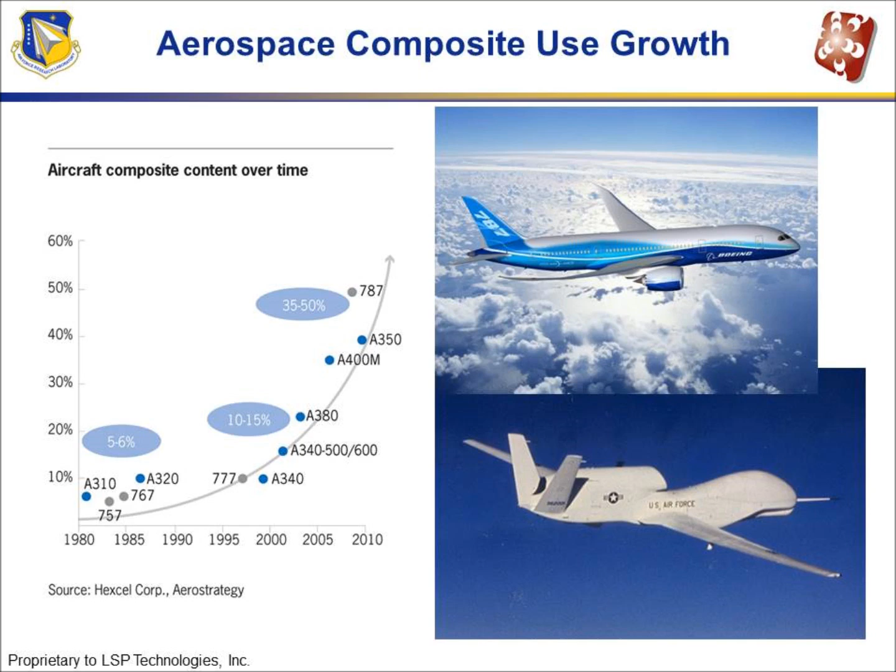They are also used in primary structures in UAVs. For the industry to certify these structures, it is necessary to determine the strength of the adhesive bonds in these structures. Conventional non-destructive testing, NDT methods, are unable to assure that the bond strength is acceptable for service.

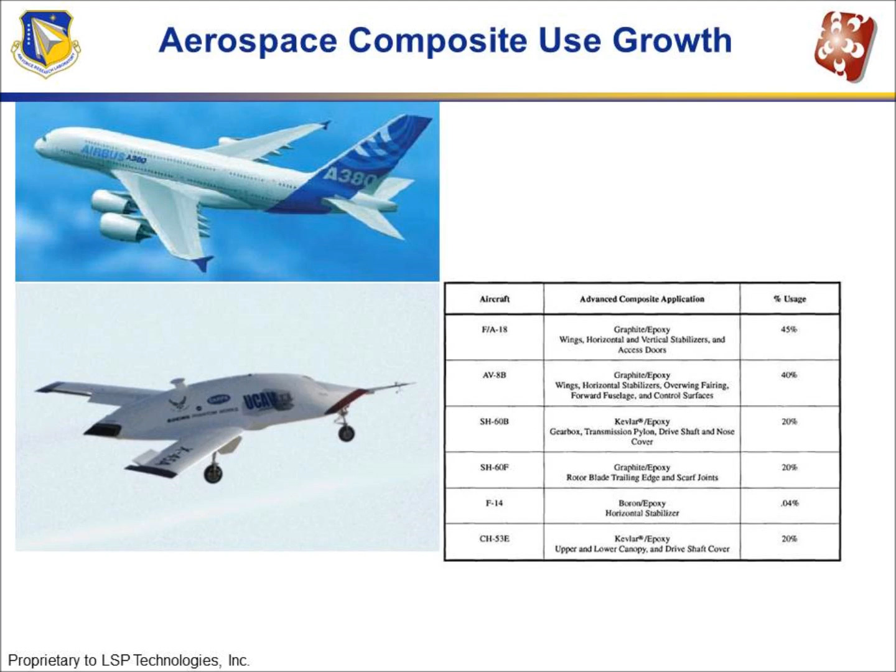There are a number of advantages that bonding has. In particular, composite bonded structures produce greater stiffness. It allows uniform load transfer, forms smoother aerodynamic lines and surfaces, and has the possibility of eliminating rivet holes or significantly reducing them. Bonded structures do require a reliable inspection method for characterizing the strength of composite bonds.

The solution we have developed is called laser bond inspection. This represents how the process works in a simplified fashion.

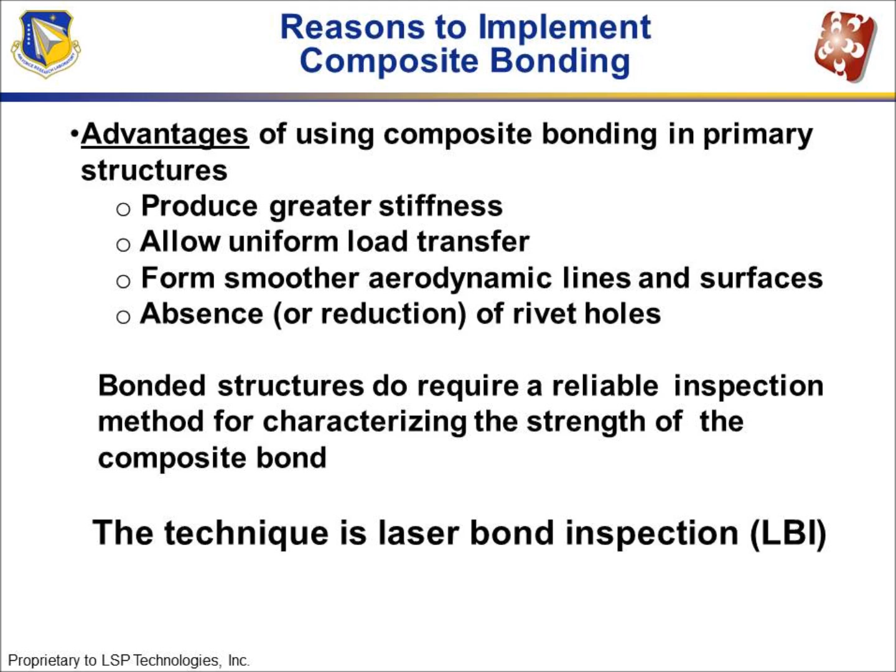Laser bond inspection, or LBI, is a pulsed laser system. Depending upon the type of structure that you're inspecting, the laser parameters could be anywhere from 5 to 50 joules of laser energy and 100 to 200 nanosecond pulses. Typically, our beam diameter is around 10 millimeters.

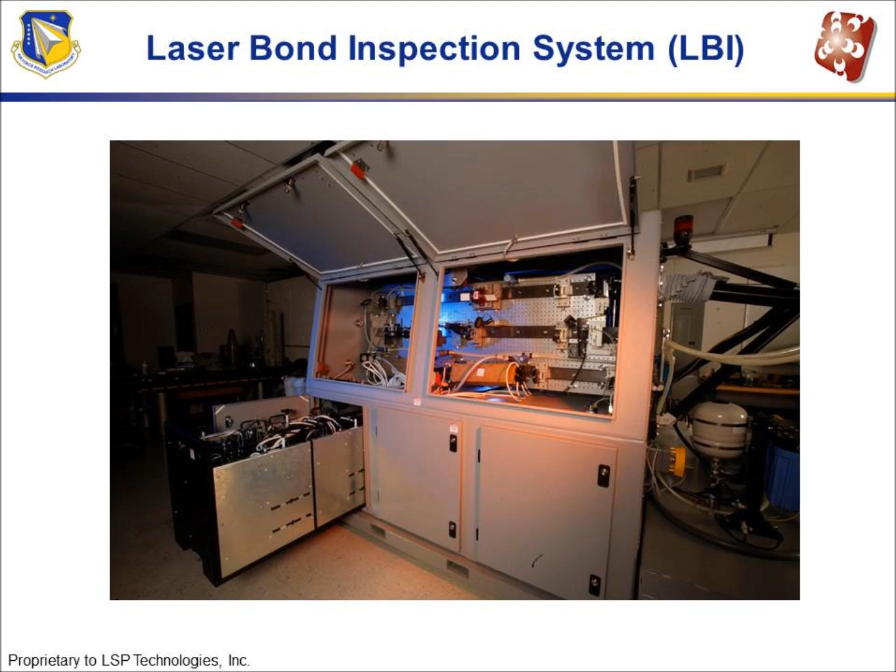Preferably, you'd like to see the beam diameter much larger than the thickness of the bonded structure so that you get reasonably planar waves. The process works like this. You prepare the material to be inspected by applying a thin layer of material to absorb the laser beam, which could be tape or black paint.

Then you flow a thin layer of water over the opaque overlay. What happens is that the laser beam comes through the transparent water overlay, is absorbed by the opaque overlay, a plasma is created and starts to blow off.

The water overlay temporarily contains the plasma and intensifies the shock wave that is then produced as the plasma blows off. This directs the compressive wave to travel forward through the composite material, through the bond line, to the back free surface of the material.

At that point, because of the impedance mismatch between the composite material and the air, you get a reflected tensile wave, not shown here, which comes back through and it interrogates the bond line.

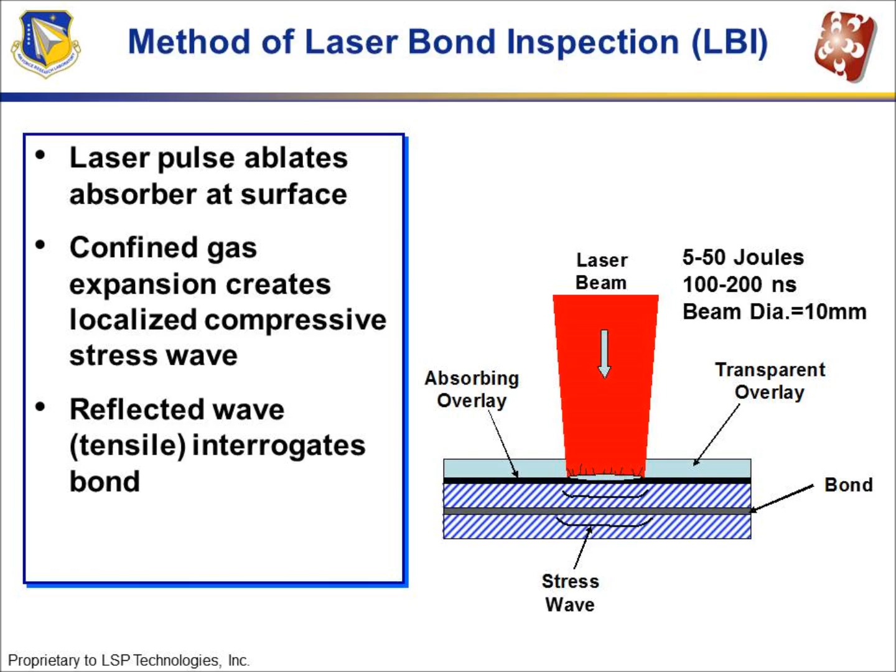This graph is a simplified version of what happens in the composite material where you produce the shock wave. It describes how we form the tensile wave.

Again, here's a schematic of what happens as I described before. The laser beam comes in, goes through the overlays, produces a shock wave that propagates through. Here's a one-dimensional view, a simplified view, in which the beam diameter would be much greater than the thickness of the material.

You form a compressive wave, it travels through the material, and as it reaches the back surface, it begins to get reflected as a tensile wave, and so it gets canceled out as the tensile wave and compressive wave starts propagating backwards. You have a small region where there is very low stress.

After it continues to propagate, it propagates outside, beyond where the compressive wave was, and you have a tensile wave then that is flowing back towards the bond line, which will stress the bond line and interrogate the bond line to test the strength of the bond line.

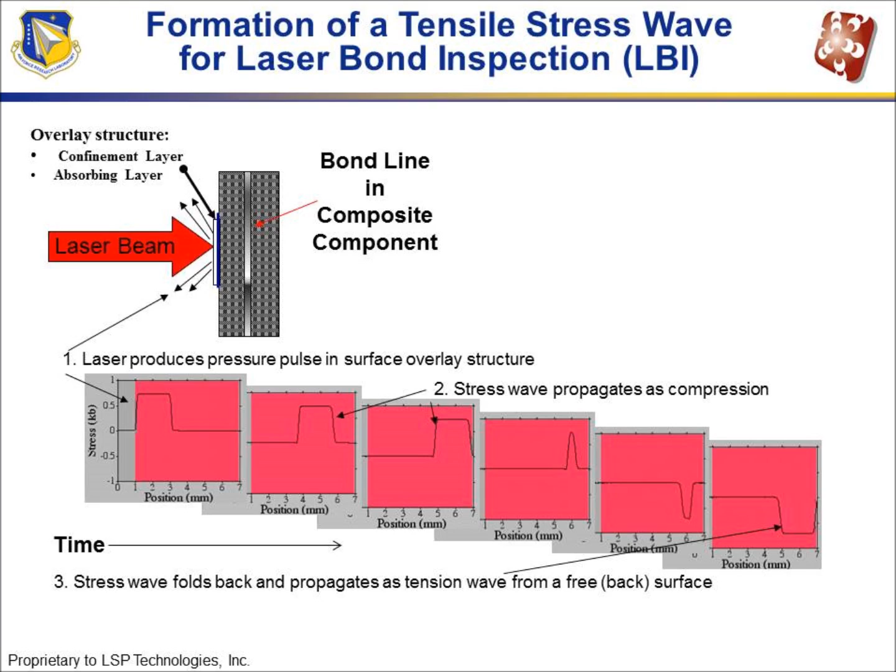This is a code simulation that results from a 19 millimeter diameter solid beam that is interrogating a 19 millimeter thick aluminum plate. In this particular case, since the beam diameter is about the same thickness as the aluminum plate, the stress waves that are produced are much more complicated.

It's just not made up of a single compressive wave moving forward, but actually has compressive and tensile waves moving forward. The complication exists because of the edge effects on the beam finite dimensions, but this shows exactly what happens at the back surface.

Shown here is the XY dimension of a particular shot in time at 3 microsecond time points after producing the shock wave. You can see here that this is a moment in time in which the main compressive is close to the back surface.

What is plotted here is the rear surface velocity as a function of time. The plot shows that the main stress wave hits around a little after 3.4 microseconds, and there is the second tensile wave. Then there's a third compressive wave and a second tensile.

What happens is that at this time, the compressive stress wave reflects off, comes back through, gets reflected off of this surface, comes back through again, but is attenuated in its motion through the material, and the period starts again. This is a sample of a case where the diameter of the solid beam is approximately the thickness of the aluminum plate.

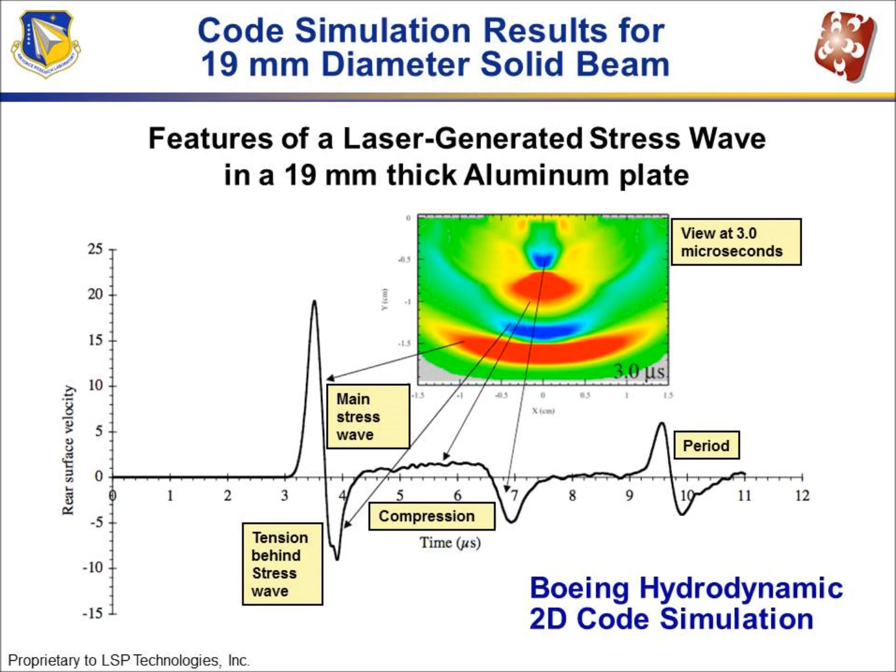Laser bond inspection creates a stress wave that can test the strength of an adhesive interface in a composite bond. The strength of the stress wave can be selected by varying the energy and pulse width of the laser beam. The strength of the reflected tensile stress wave produced can be selected to fail weak bonds while strong bonds are unaffected. I'll describe that more when we cover how we measure bond strength.

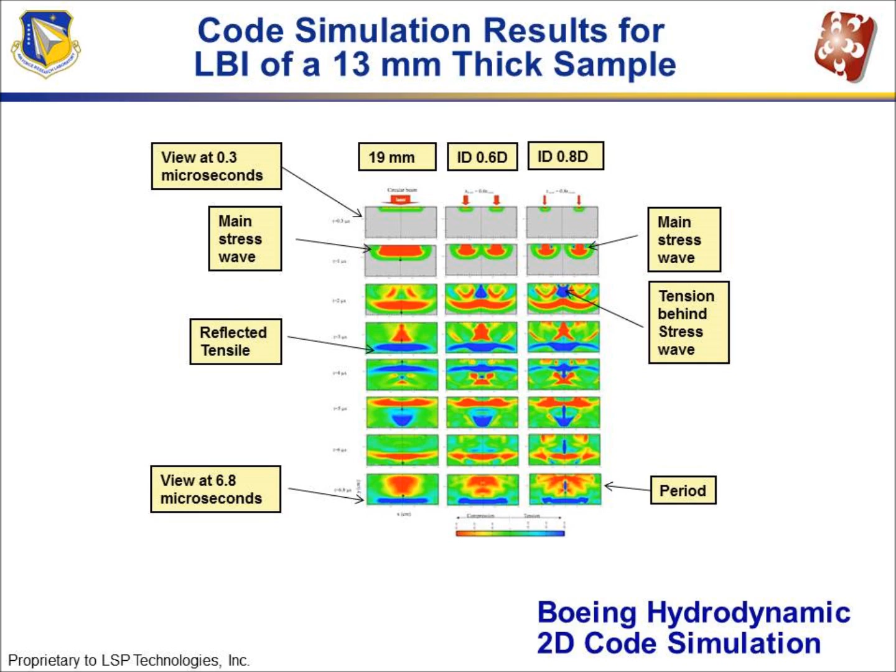LBI can be set to detect weak bonds. It is non-destructive to strong bonds. It can also detect kissing bonds. These are bonds in which the bond line is in intimate contact with the laminate that is around it. There's no gap between the bond line and the composite material, but it doesn't have good adhesion to the surface. So there's a weakness there that would be important to detect.

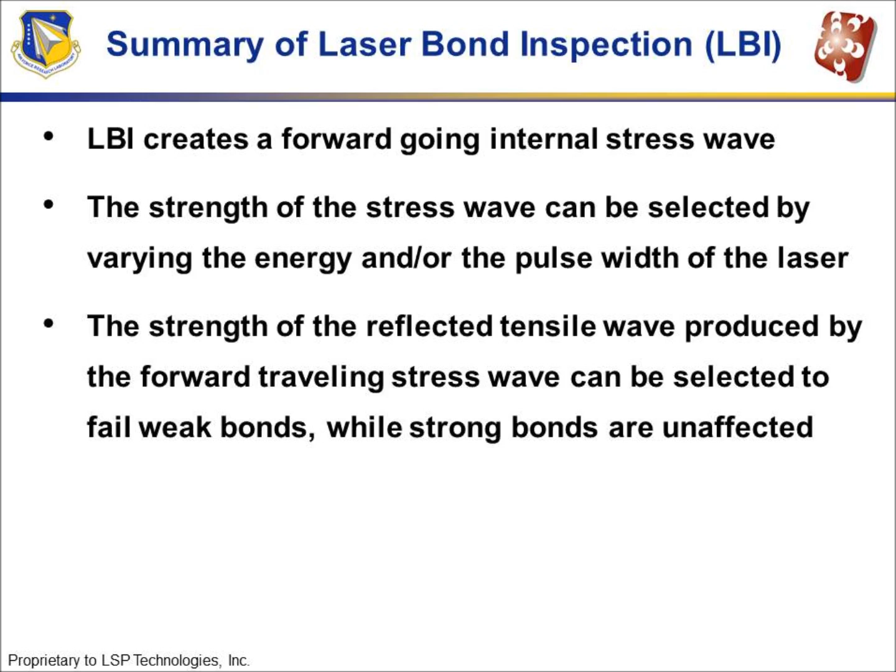LBI will also detect variations in bond quality, different types of surface preparation, adhesive mixing, and contaminations in the bond line material. It is a localized test of bond strength in that it's measuring the strength of the bond in the region of the diameter of the laser beam being used to interrogate the bonded structure.

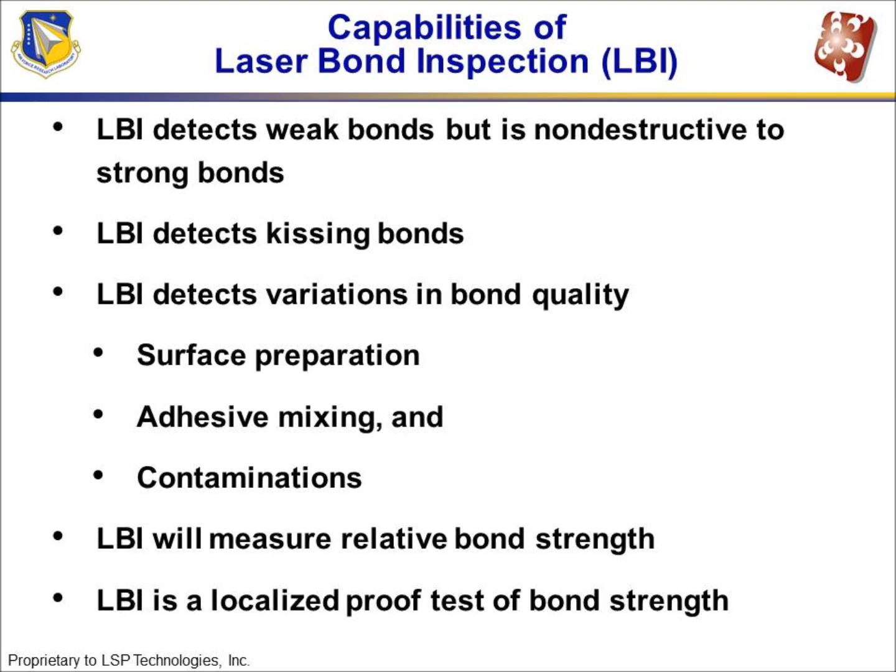By varying the fluence of the pulsed laser beam, we can modify how we affect the bond line. If you start off at a very low fluence, like 3.4 joules per centimeter squared, using ultrasound after the testing, we can see that there is very little damage to the bond line. As you gradually increase the fluence level, you see more and more damage until you have strongly damaged the bond line.

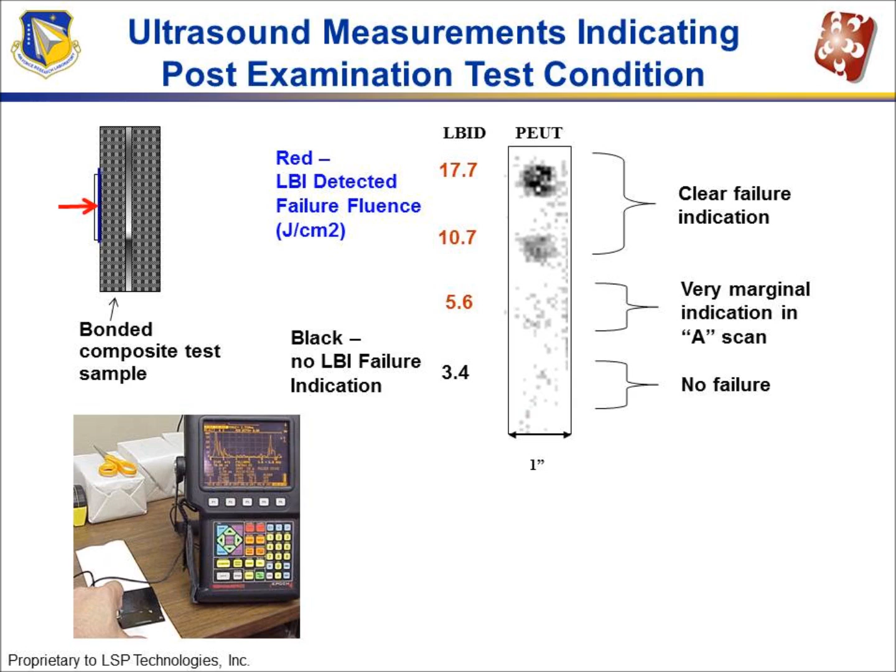This is just one technique that we use post-test. We also have another technique using an EMAT gauge, which I'll talk about later. EMAT is an electromagnetic acoustic transducer which actually measures the bond line in real time. This is an indication of how we detect a bond line failure after the fact. You can use ultrasonic measurements after the laser beam for post-examination of the test condition.

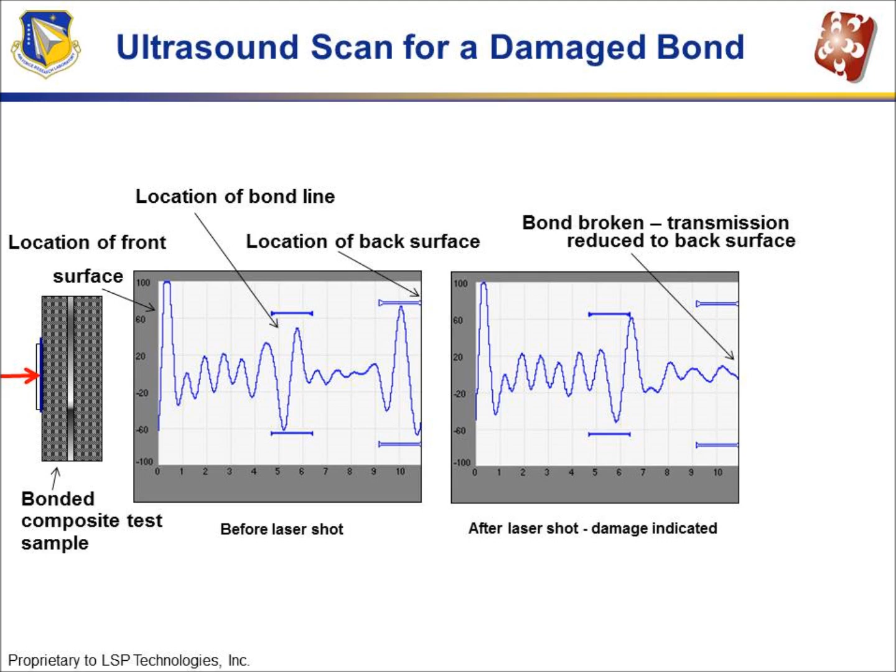Laser bond inspection can detect kissing bonds. This is an example of a VISAR measuring the surface velocity, the back surface velocity of a composite material. Again, we have our normal test setup with the laser beam and the overlays looking at the bond line. The beam is weak enough that it does not affect the bond line.

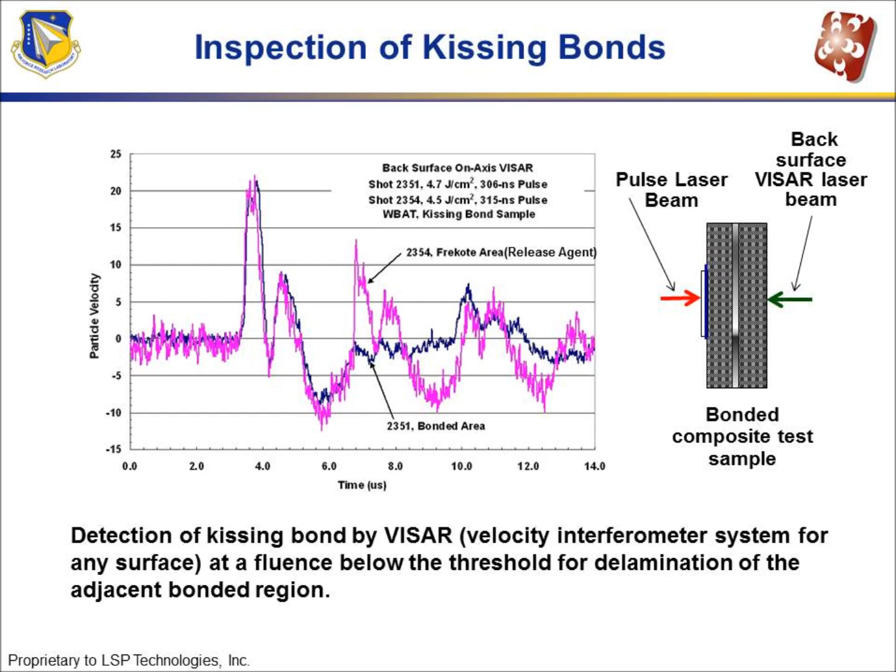Next, we look at measurement of bond strength by laser bond inspection. In order to determine bond strength, a damage parameter is assigned based on laser fluence, what we do is assign a value of 0 when no bond damage can be detected by the UT scan.

This is what we just discussed and what UT can detect, what's there, and if there's a lot of damage or no damage. It's a very simple method of determining bond. If there is perceptible bond damage, we assign a value of 1/2. And if we detect a significant level of bond damage, we assign a value of 1.

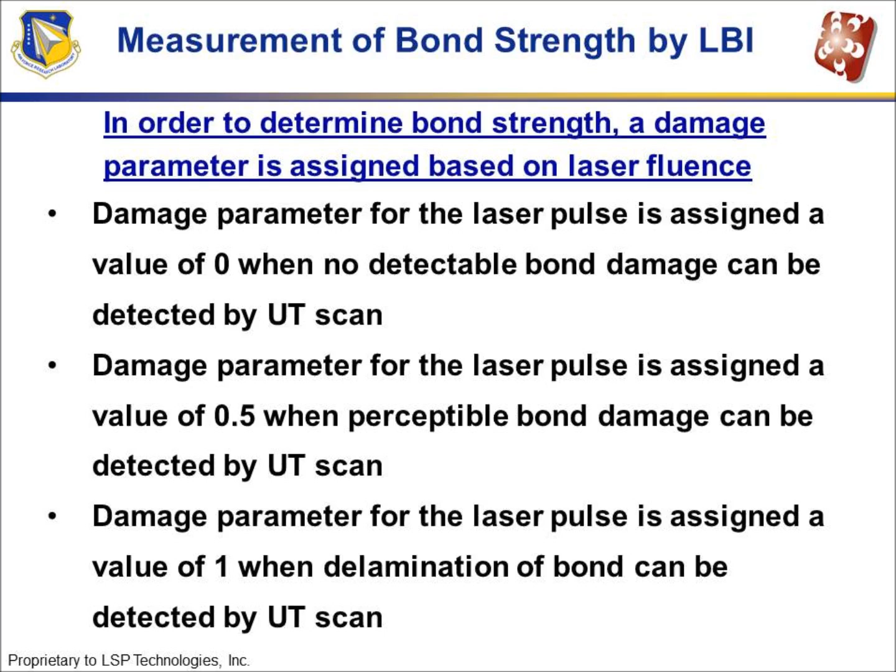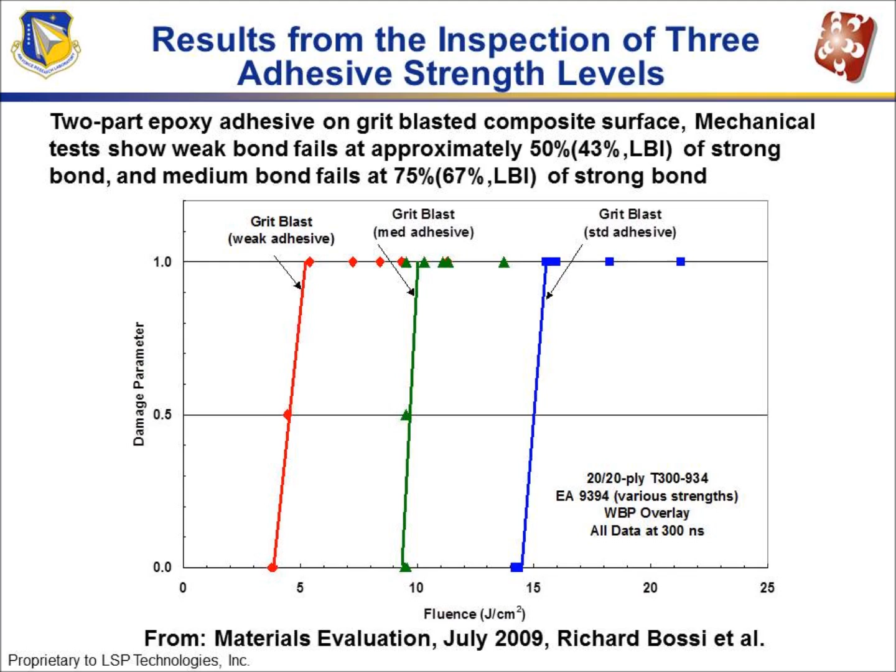This graph shows you the effect that multiple shots have on a bond line. It's important to understand that if you interrogate these materials and do damage to them, you weaken the structure and impart damage. So we wanted to avoid that and know how the structure behaves with multiple shots, to see if we are interfering with the strength of the bond line.

A test sample is represented here. In this particular case, we graphed the number of pulses to failure as a function of front surface velocity. You can see at the higher velocities, that means a higher stress and higher fluence level. That's where you're doing the damage, and it only takes one shot to break the bond.

But as you go to lower velocities, as you get into the region where we're doing bond detection, you can see that it asymptotes out, that you get to a point below which you don't see any failures even after multiple shots. So this is an indication that laser bond inspection can be used without interfering with the strength of the structure.

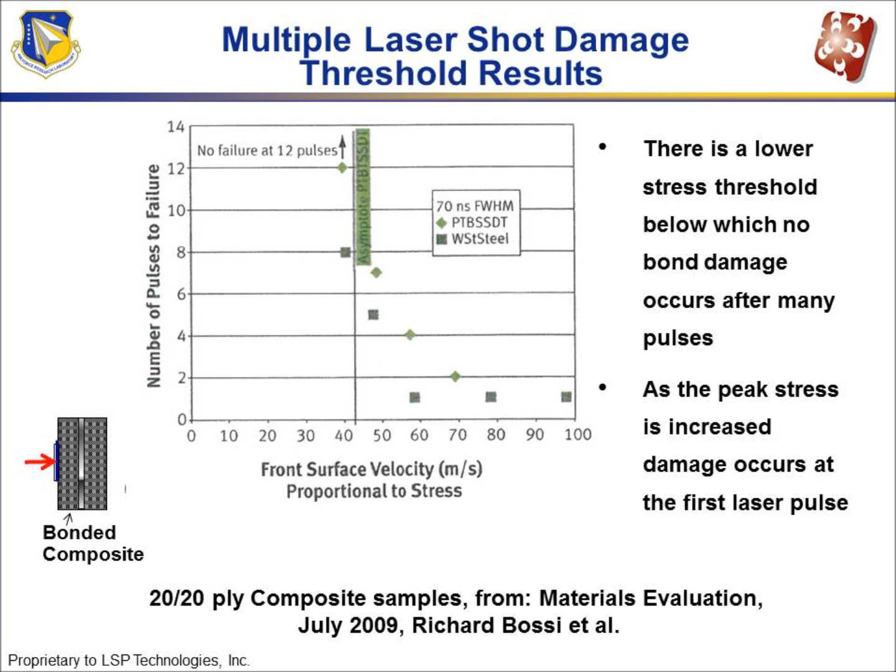Now we'll go on to our mobile laser bond inspection system. These are the general specifications for that laser system. It is capable of putting out 5 to 50 joules. Pulse width can be varied between 100 and 300 nanoseconds. Both of these parameters are adjusted according to the requirements of the material you're inspecting, considering the thickness and other characteristics of the material.

The repetition rate is one shot every 8 seconds. We use an infrared laser beam at 1054 nanometers. The dimensions are about 6.5 feet high, 5.3 feet wide, and 13 feet long.

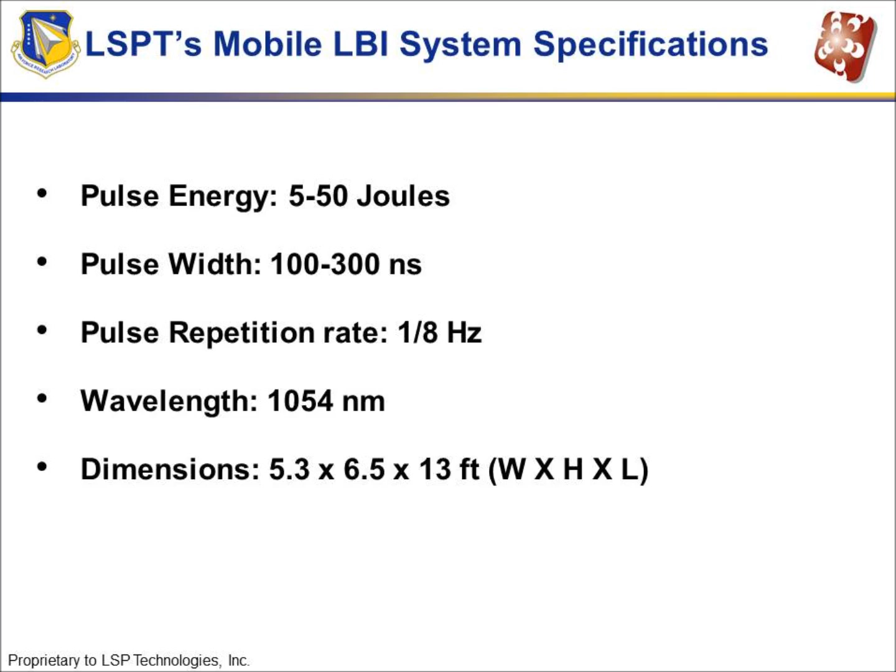This picture is of the original mobile system built on a United States Air Force program. It shows the main laser system. The optical configuration of the laser is in the upper chamber, and all the electronics are in the lower. We deliver the beam by an articulated arm that goes into an inspection head. This is the original inspection head we developed, and we have developed an updated one that we'll look at next, but you can see it's a pretty compact system. It can be taken through standard double doors and easily moved about.

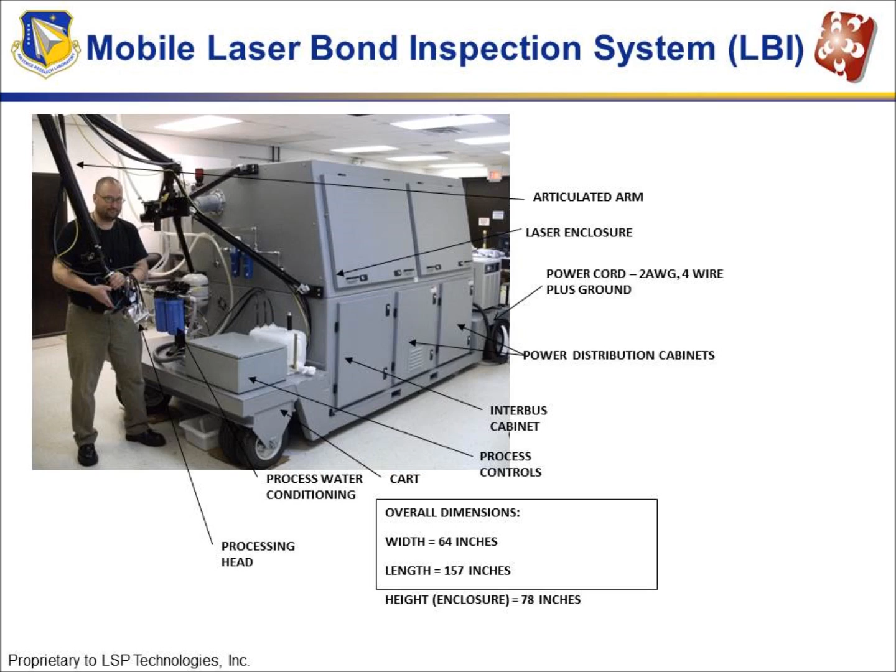This is the new inspection head that we developed. You can see that it is more modular. The inspection head contains an overlay water delivery and removal system so that it picks up the water after it applies the laser beam and contains the water. The system has quick disconnects so that the water lines can be easily removed.

It also has a vacuum hold down that prevents laser light from escaping so you can use it in a safe fashion. It has controls and LEDs that tell you the status of the system and if you have a good spot or a bad spot in the composite. A computer system acquires all the data and stores it in a database.

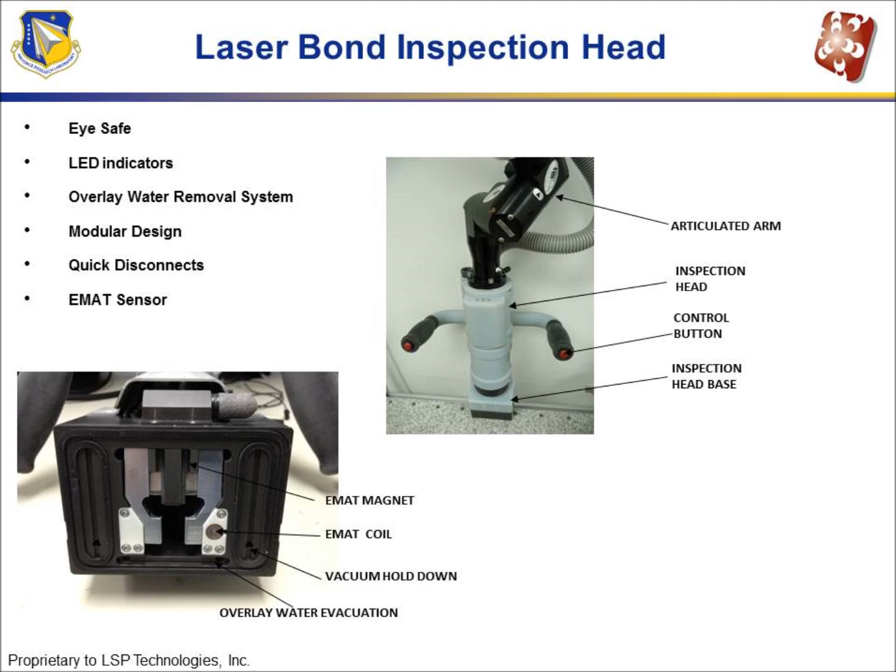The sensor that we use on LBI is an EMAT, which is like a Visar. It measures the surface velocity to determine the strength of a bond line. Here's the bottom of the head: the water nozzle to deliver the overlay water, the EMAT coil used to pick up the signal of the moving surface of the composite, the water evacuation, vacuum hold downs, and the magnet for the EMAT. Now let's discuss how the EMAT works.

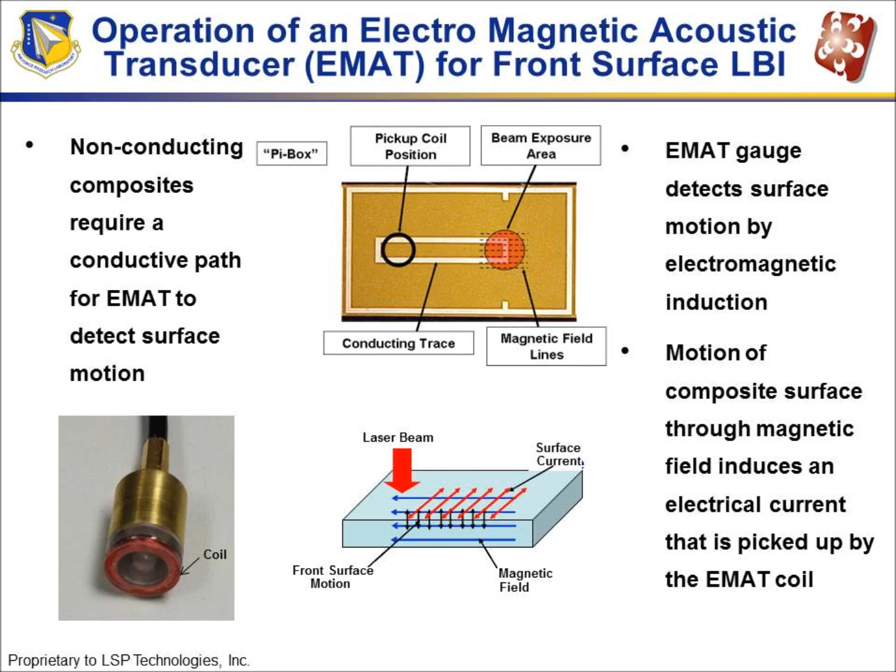Since we're dealing with composite materials, we need a conducting path for the EMAT. This is just a reproduction of the actual EMAT. To get that conducting path, we have developed a special tape that has a copper trace that provides the conductive path for the EMAT. The EMAT is positioned at one end of the coil, and the laser beam is positioned at the opposite end of that circuit for the conductive path.

The magnetic field lines produced by the inspection head run parallel to the surface of the tape. The laser beam comes in, and as a result of the shock wave produced through the composite, that surface starts to move. As the conductive pattern moves through the magnetic field, an electrical current is set up in the path. That electrical current is sensed by the EMAT, so it's able to detect the surface velocity, the surface motion, just like a Visar, and determine exactly what type of variation the bond line is going through as a result of the interrogation that LBI is doing.

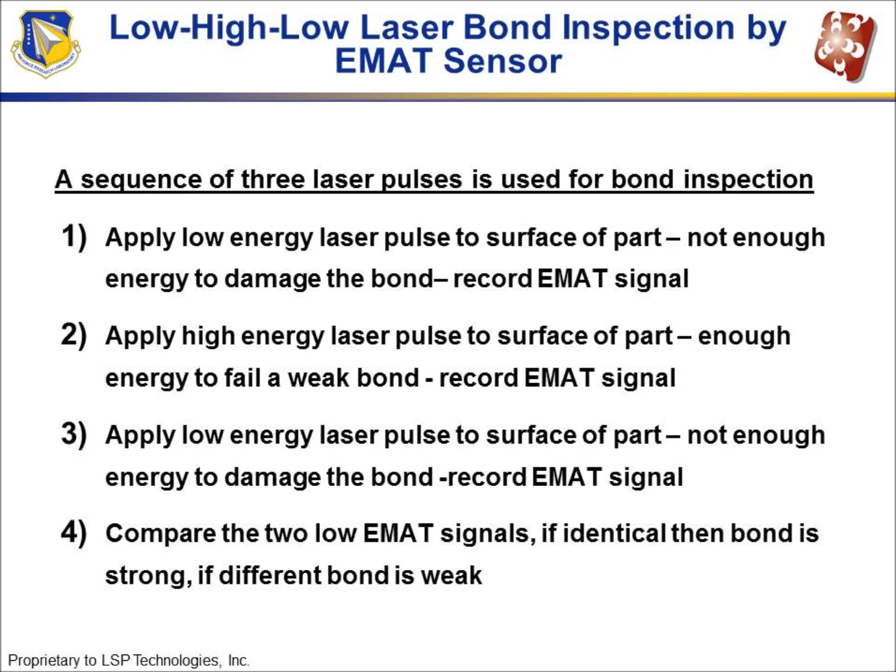To use the EMAT gauge, we use a technique of low-high-low inspections. It consists of 3 laser pulses. First, we apply a low-energy pulse that has absolutely no effect on the bond itself, but it gives you the condition of the bond line before you interrogate it with the strong shock wave.

That is a shock wave just strong enough to affect weak bonds, but not strong enough to affect a strong bond. So we do the first interrogation with a weak laser energy pulse, and then we apply the high energy pulse that actually does the interrogation to see if a weak bond exists. Then we hit it again to determine if anything has changed as a result of hitting it with a high energy laser pulse.

Finally, we compare the 2 lows. If they are the same, then the bond is good. If they are different, that indicates that there is a problem in the bond line.

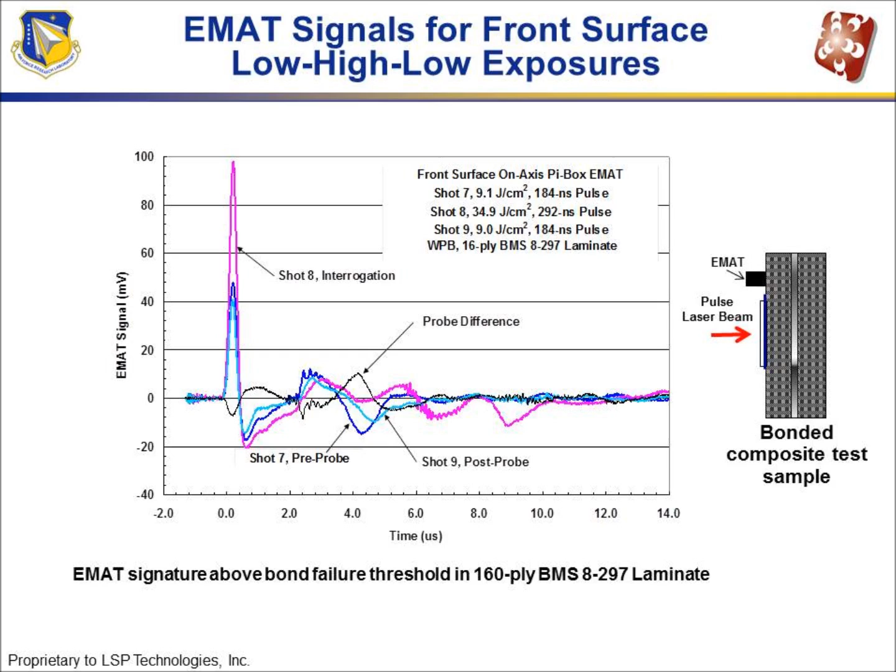To summarize, laser bond inspection creates an internal tensile stress wave that tests the strength of an adhesive interface of a bonded structure. Laser bond inspection detects weak bonds at the adhesive composite interface. The strength of the stress wave is selected by varying energy and pulse width of the laser according to the requirements of the particular composite material being investigated. The strength of the reflected tensile wave is selected to fail a weak bond while strong bonds are unaffected. LBI can inspect bonded structures that are less than 1 inch thick.

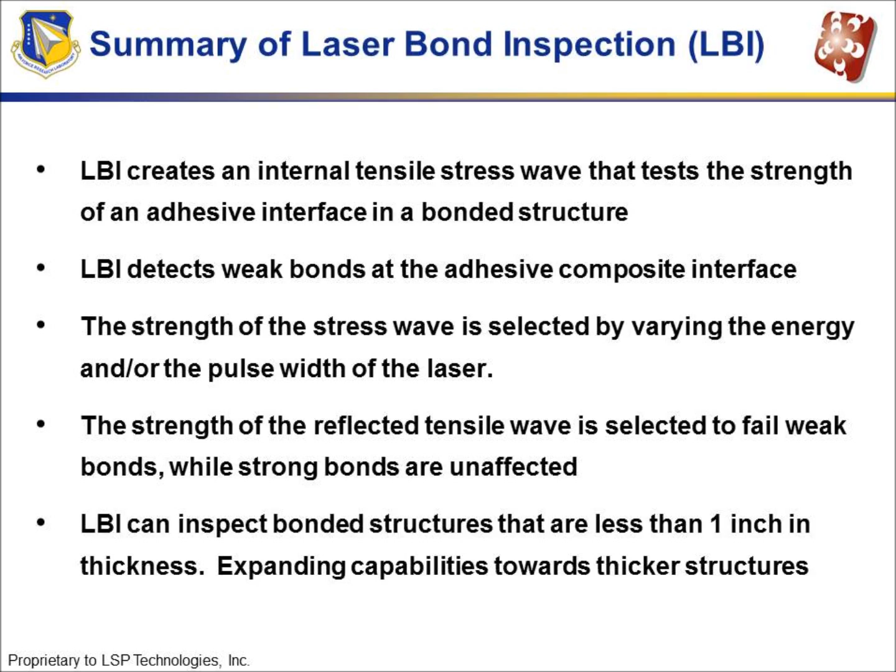And our conclusion: laser bond inspection systems are now available for purchase from LSP Technologies. The mobile laser system can be implemented on a production or depot floor, and the mobile system can be configured for different production requirements. Laser bond inspection of composite structures is available at LSP Technologies. If you want to test some material, we're available for testing it.